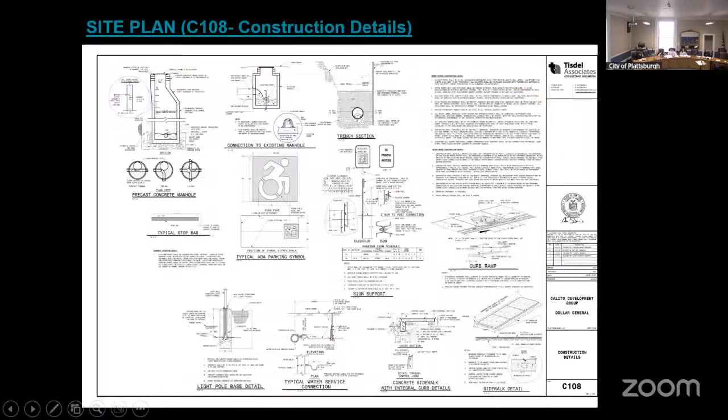Yeah, everybody see that? Can you just drag up where the name is, and the source says March, PB, yeah, that's a little bigger, perfect, thanks. What are we looking at there? So Rick, can you see these enough to describe?

So my proposal would be to at least extend the containment area and have that be screened as well, whatever materials you deem necessary to achieve that, just as with the dumpster. I don't care as much about that as I do what it's blocking.

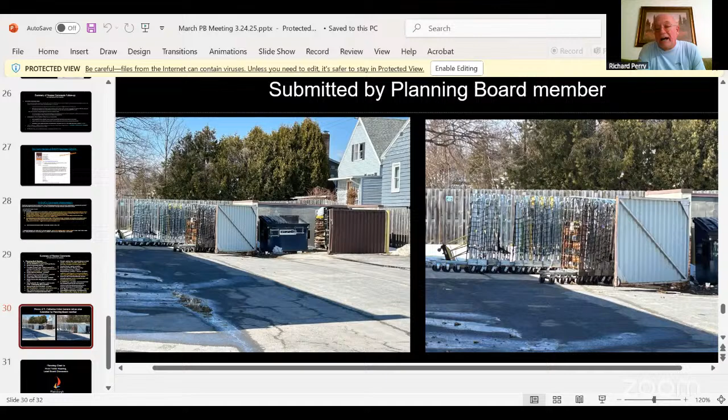Is the enclosure there like that brown metal panel? That's the fencing material, and the door is a gate that's open, you see the white on the inside. And those shopping carts that are consolidated? No, those are carts that they empty the trucks on. They bring them inside, take the product off, put it on the shelves, keep the empty boxes on the carts, and store them out there. So it's part of the loading and unloading process.

Yes. I mean, it looks like a little mini Home Depot lot or something. Unfortunately, that stuff gets blown around. In this picture, they're at least organized, but that is not typical of what you would see in some of these locations, and I think as a preventative measure it should be contained.

Well, and you would think having those carts in an enclosed area would also keep anyone from messing with them or stealing one as part of their stock or equipment, right? Yeah, I think to add to my concern is that we have the ability in the site development to require these things, but we don't have the ability to go beyond the site requirement. So I think if we establish the intended enclosure, then other agencies that have enforcement authority will have the ability to require them to utilize it.

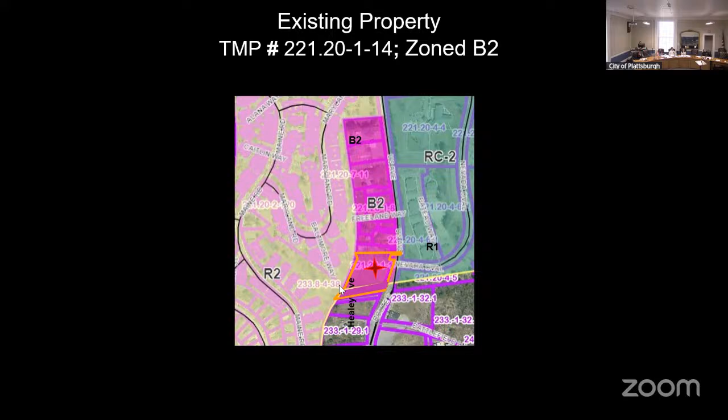This is an overview of the site. Again, it's B2 zoning right along the town line. Adjacent town zoning. Photos of the frontage along the property from US Ave, which is also Route 9 and US 9.

The cover of the most updated version, revised version of the plan set dated March 12th, 2025. So just a minor revision is recommended here.

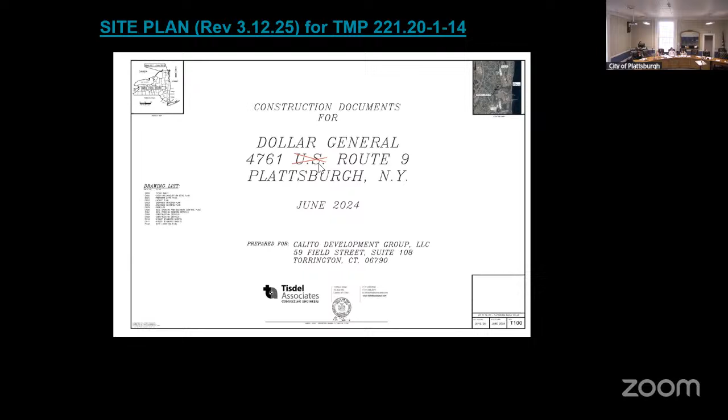And then we hop into the existing site, C100. Nothing has changed in this first page. Great, just trying to make sure, with the exception of the zoning information table, the updated number of parking spaces required was provided. And then on this sheet, actually it's too small for me to see, but there's a concrete landing and walkway that's provided along the north side of the building.

A temporary, portable bike rack is provided in front of the building, to the Looker's right.

There has been a modification to the property line depiction along the northern property line, showing where the potential future subdivision line would be, while the existing northern property line is now depicted again. The delivery truck maneuverability is also overlaid on this plan again.

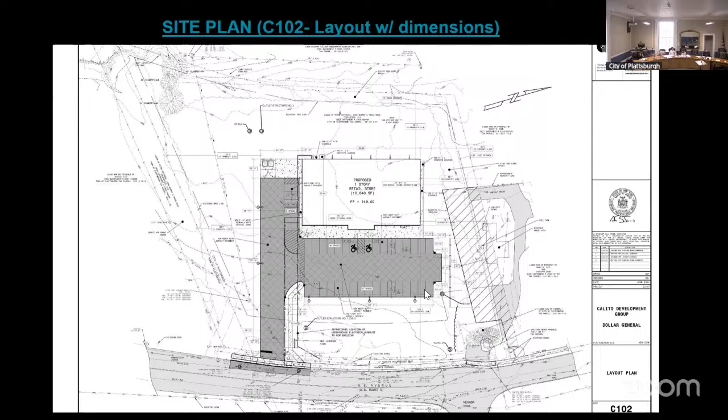This is the enlarged grading plan on the east side of the building, again no revisions that have not already been called out. West side of the building, same.

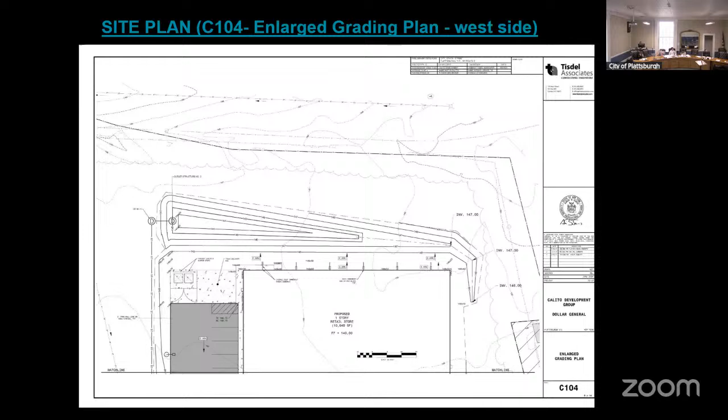This is the profiles for water and sanitary sewer and drive entrance. There were previous updates to this back in February, based on DOT comments, but nothing for this revision.

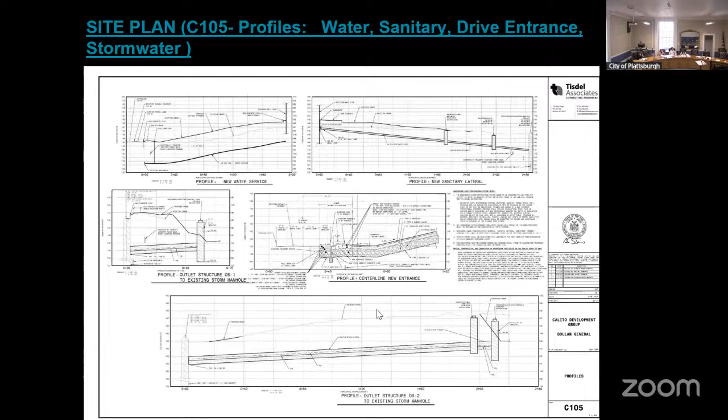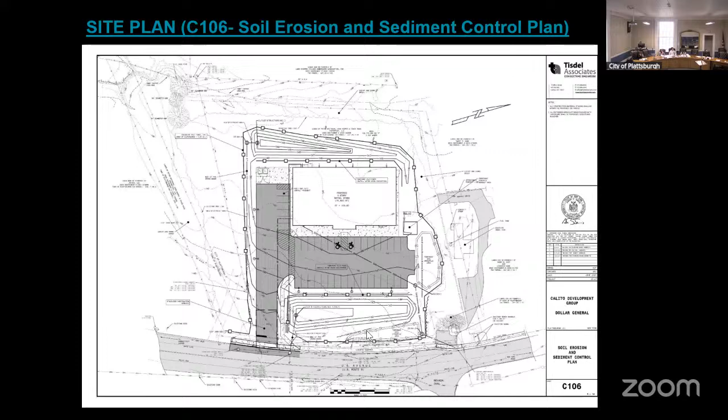The soil erosion and sediment control plan again has no changes. Erosion control details, no changes. Construction details remain the same.

The second sheet for the construction details, C109, has the fence detail for the receptacle enclosure. It's proposing a 6-foot high wood screening fence, and below that is a note for vinyl fencing. There's a recommendation that the note be updated to match the proposed material.

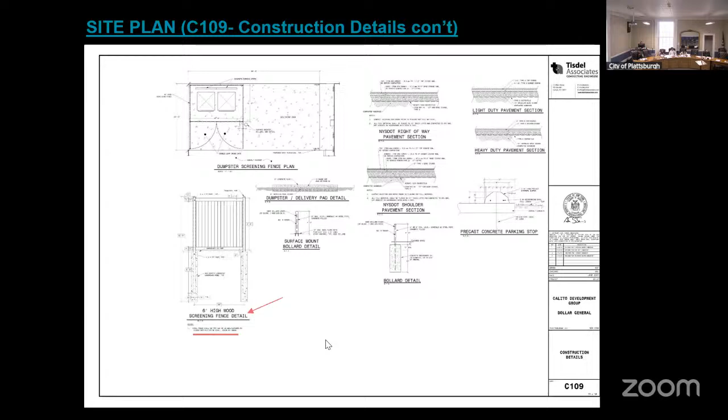No updates to these two sheets. And then here's the lighting plan, E100.

The fixture schedule does have a couple of notes on the right-hand side. For fixture symbol A, there's a note that it will be complete with a PAPCO catalog number, which I can't read entirely right now, but a shield is added and it will be dark sky compliant. Fixture symbol B will also be dark sky compliant.

Additional fixtures were added to the north side of the building to provide lighting for the emergency exit, and those are the B fixtures, essentially accent perimeter lighting. The entire photometric layout was updated to incorporate those additional lights.

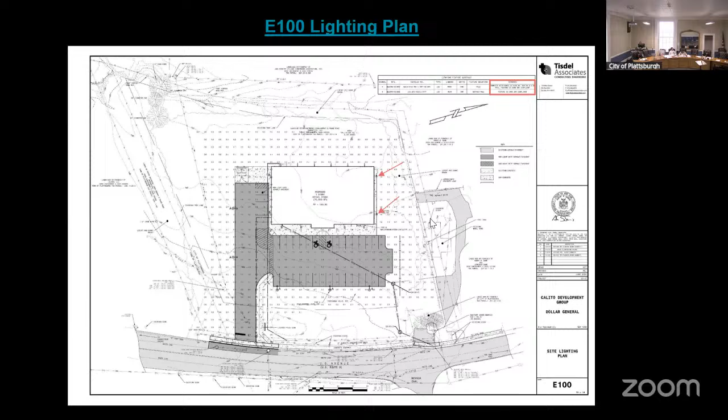The detail sheets have not changed. And then we have the landscaping plan.

I want to note that the plan date on this has not changed from October 15th, 2024, and there is not a revised date added. But revisions have been incorporated to provide the USDA zone range and the zone for the project. So I stand corrected on that.

Additional seed mixes are proposed, including Long Pennington Smart Seed Sun and Shade mix, New England Wet mix, and New England Erosion Control Restoration No-Mow mix. Those are added to the legend on the right-hand side of the plan, and incorporated into the plan along the drainage basins, called out with leaders.

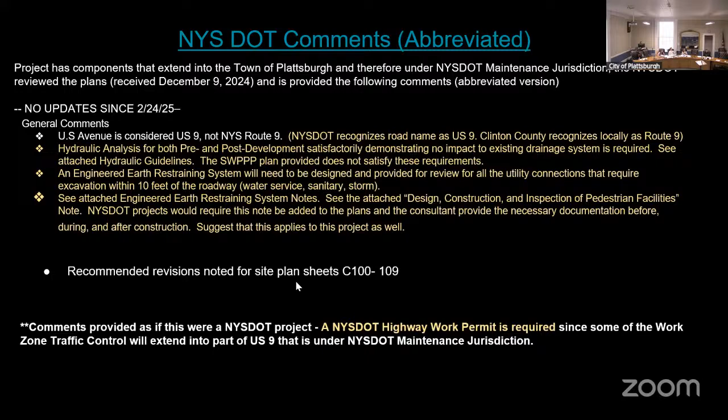These are New York State DOT comments. I left these in from last time, so there have been no new updates from New York State DOT since the applicant submitted their hydraulic analysis to the DOT. For the planning staff review, it's recommended that the applicant satisfy department comments, continue to coordinate and receive approval from New York State DOT, which they're in the process of.

The lighting plan appears to be complete. The depicted delivery location and access has been revised to provide for maneuverability, with a note regarding delivery times that they'll be outside of peak store hours. For pedestrian and bicycle access, the applicant has provided a portable bike rack, but it's recommended that the rack be a stationary rack for permanence. There are also some minor edits recommended for the applicant to refine and clarify the site plan details.

In the pre-meeting, we discussed these two pictures that were provided by Rick Perry, member of the planning board, who is virtual with us tonight, for the planning board's consideration of the proposed recommendation to expand the enclosure area to incorporate space for the additional parts. And with that, that's the end of my presentation.

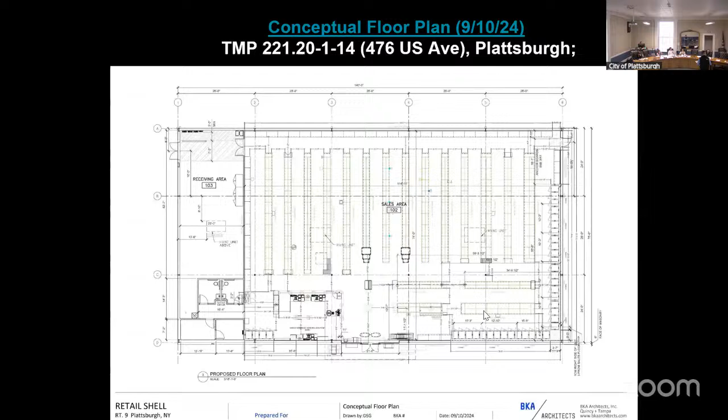As far as this is for staff, the building elevation and some of the other items we saw in the previous meeting, if we can have those added into the final package that comes forward so they're actually a part of it and included. Yeah, how come they're not part of these sets?

Is it just because as planning board you filtered it out, or gave it to you last time? Oh, it's just the same. That's right, it's just the same, all the same. So many times it does end up incorporating afterwards.

In this case, I'm just asking what it does. It'll make it a lot easier for building staff if they're looking at this and have to enforce it. Yeah, that it's part of one package.

There's the RTUs popping up there, Carly, the yellow chimneys. Matt, so both Carly and myself have experience working with the energy efficiency rebate program up here, so you can reach out through Alicia if you have any questions. It's the IEEP.

And so you might get some money back for like your lighting, rooftop units through them if they still have their commercial program open. Okay, I appreciate that, thank you.

Yeah, you're gonna do all internal LEDs, right? It's all LEDs internal, yes.

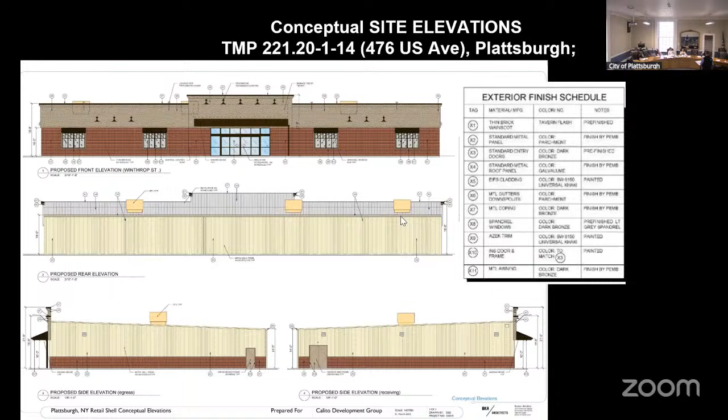Is there a note on the plans about maintaining the tree vegetation on the south? We have a line for tree line remaining there. So I think that's on the first page. Okay.

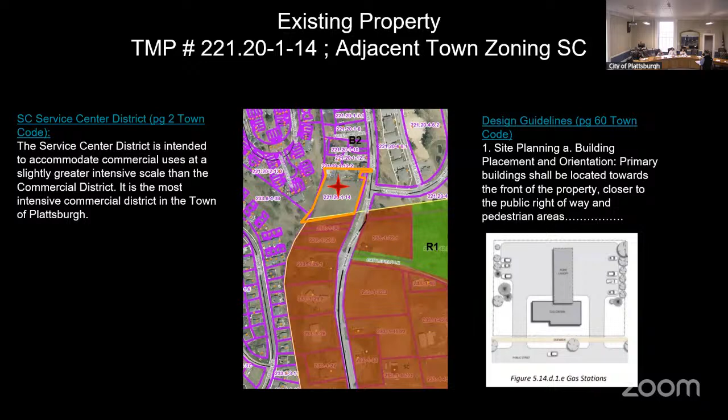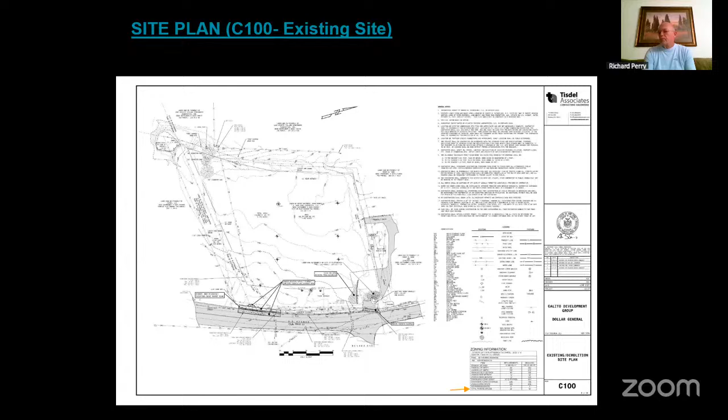I just noted that with the chip comment. I think I saw something, the building inspector made a comment about that, that was gonna be one of my questions too, yeah. That's about right for me.

Okay, look at C100 right on the bottom, there's down by the... I think it's a municipal pump station. Okay, that's what we thought, yeah, electricity. Okay.

My last question, then I'll let staff or let the rest of the board go through if there's any other.

There's this discussion on enforcement of delivery times. That's a note on the plan. The note says this was requested by staff last time. Okay, it says...

All store inventory deliveries will be made outside peak retail hours. That doesn't mean that the store is closed, but more likely to be at 7 in the morning than at 5 o'clock at night when we're shopping. Yeah, and if I may, for clarification: I was not recommending that wording, but because the applicant stated that would be the case for deliveries, and that's how they would maintain pedestrian and vehicle safety when the delivery trucks entered onto the site and were backing up, it was requested that it be added to the plan.

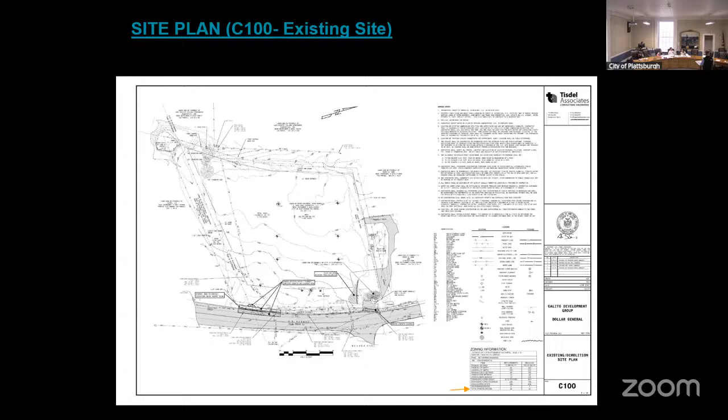You have the same on any gas station where they're delivering fuel. You're in the same situation. They do that the day as well. So would the trucks not just back in off of 9? No, they're not allowed to do that. Usually they'd be blocking, back up. But if you look, I can, yeah sure, many gas stations have an entrance and an exit.

Can you go back? So this truck is coming in this way, looping around, and it's backing up that way, so at no point are they actually crossing a parking space while they're backing up, until they get to the very end, which realistically, those are the spaces that are already parked at Dollar General, unless it's employees.

So Alicia, what's your concern with this proposed? Well, initially, the parking - the number of required parking spaces was greater before. And I think before it showed that last space, where it's hatched out, was included in the proposed number, I believe. Yes.

The other concern is just pedestrian safety as a truck is backing up on site. And with that, I'll let Rick jump in.

Oh, and is that what you mean by other places have like a wrap around? The truck is never backing up, it's always going forward? For grocery stores where I've observed this, yes, larger format stores, yes. Not necessarily at another convenience scale store like a Stewart's maybe, or Kinney Drugs.

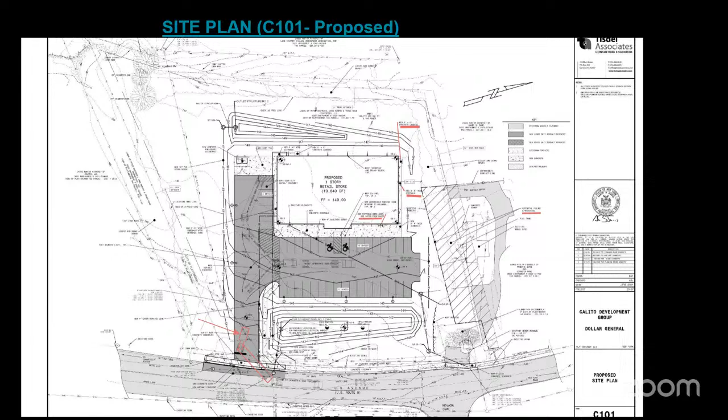Thanks, Rick. Okay. And from my end, if the board prefers that masonry monument sign that I passed along, that's what's already been provided to Dollar General as the required sign. So that's what they'll go in as. I just wanted to make sure that that's what you wanted, that one, rather than a pylon looking sign. Yeah, okay, definitely, okay.

My opinion is, as long as it's not a visual impairment, then I'm okay. It looks good. Okay.

Last comment regarding the truck maneuvering. I know we've talked about this narrow drive before, but has DOT reviewed it? DOT will not allow a driveway typically wider than 30 feet. They're okay with the truck going over the lawn, but you'd have to shoehorn it to get the perfect drive.

That's only from one direction. Yeah, then they'll drive over your curb stop. I think they can make this work, but this is what DOT wanted, and this is the layout they required. I like that the sidewalk is hanging back from the corner, cutting way over, out of the way. I think that's the new DOT guidance, to make shorter pedestrian crossings.

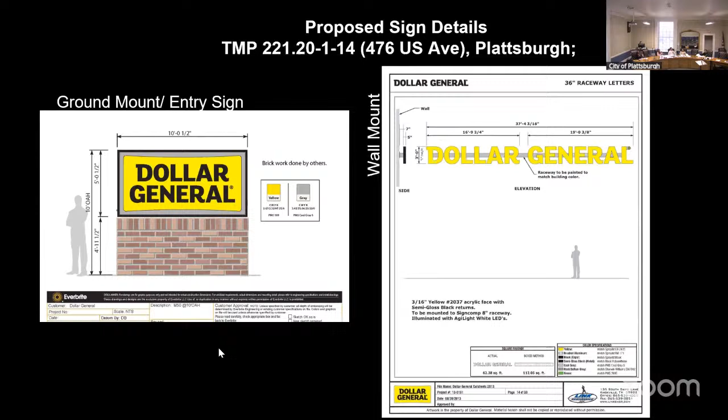With that said and no other board comments or questions, we do have a proposed... we should hold a public hearing. So I guess we'll move to open the public hearing, or is it still open from last time? We never held the public hearing. We did not hold that, okay. Then I'll move to open a public hearing for any comments from the public.

Okay, with no one commenting and no one online, I'd like to remind the board that we did receive comments earlier via email. You have 3 comments included as addendums to your packet—from July 12th we received 2 comments, and then July 15th another. These have previously been provided to the board and are included in the project folder online. I guess as part of the public comment period these can be entered into the record. Yes, they could be. I think that makes sense, to enter them as part of the record, and note that they were reviewed.